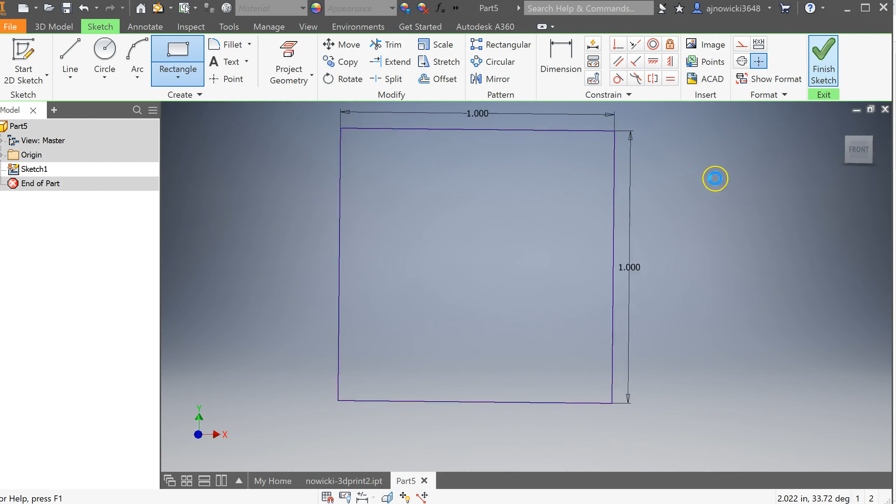So let's go to Inventor, and I'm going to make a decision die. I'll have you roll it, and two sides will have Y's on them, two sides will have an N for yes and no, and the third one will have an R for roll again. I just thought it'd be a fun little thing to make. And there we go, so there's my cube.

I want to actually fillet all the edges and stuff because I want it to roll a little nicer. And I can even set this so it's less of a fillet. Let me just flip that around. And it looks like I got all of them. Yep, okay.

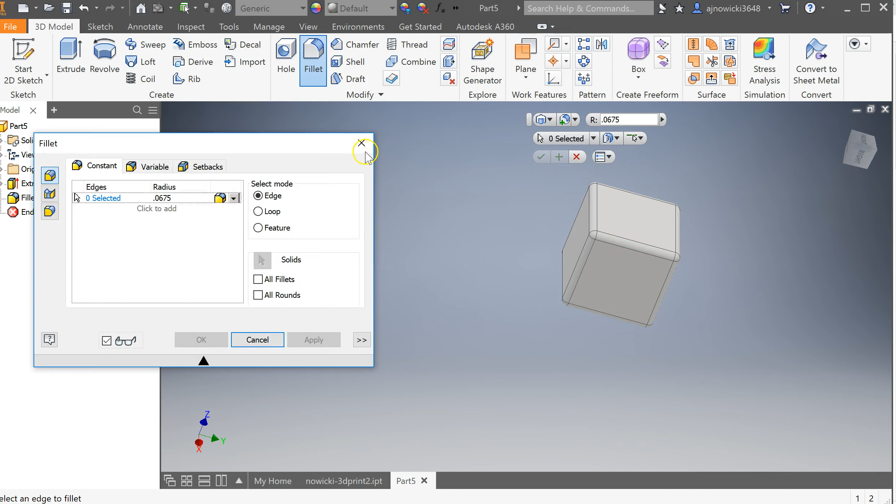Alright, so that's my die. And then I'm going to go ahead and start a new sketch, and I'm going to add my letters. So I click on text, and I'm going to click where I want it.

And then I'm going to do my Y. Now it's really weird here, I could change all these settings, but unless I have this text highlighted like this, it won't take the change. So there, I'm going to bold it, and I like the Courier New font. And then for my size, I'm going to set it to 0.5. And then I can hit OK.

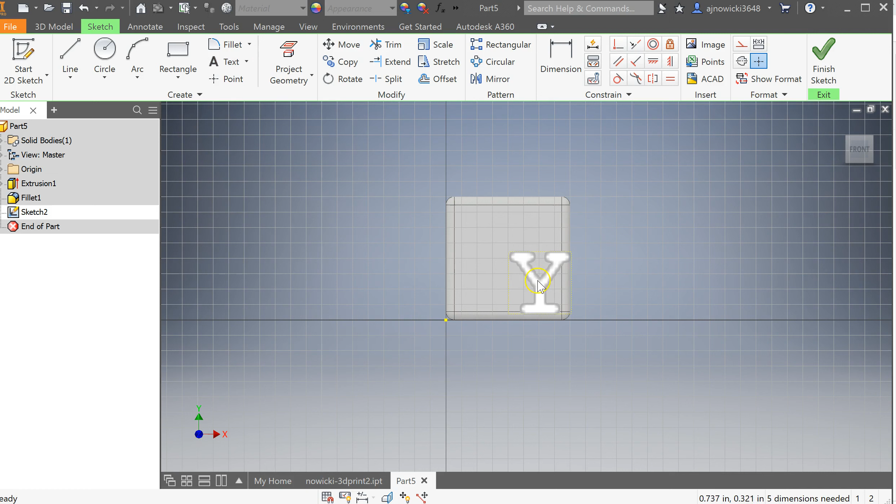I hit Escape, and now I can move this to where I want. This is where having the grid is pretty handy, so I can kind of eyeball it and space it out and center it. And then when I'm done with the sketch, I right-click Finish Sketch.

Now I have to do, you're not going to do an extrude, you're going to do what's called an emboss. So we're going to click on this, here and here, and then we're going to set our depth. And that's going to be fine. I think I had to select it first. Yep, select it, emboss.

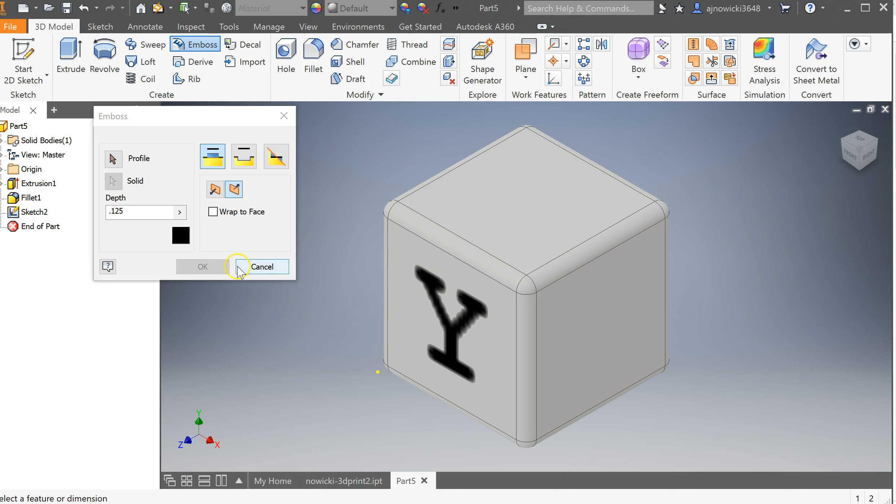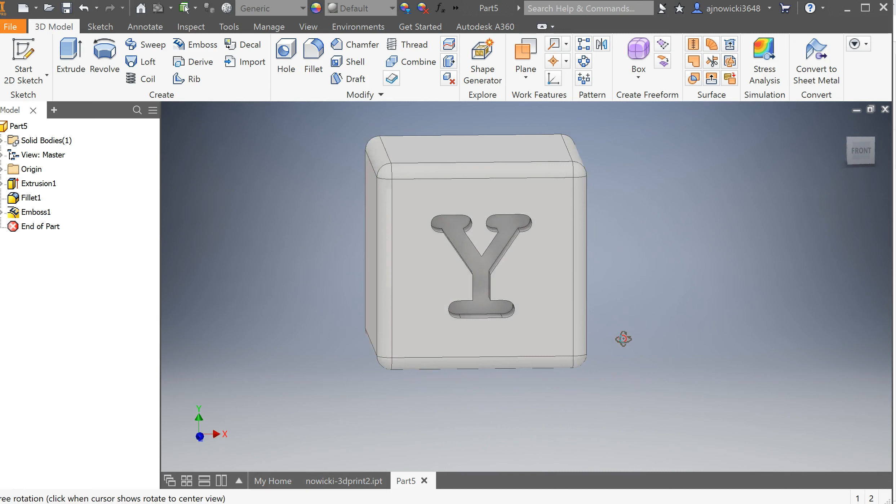Okay, so that was really weird. I had to close out of the emboss tool, and then once I click it, I click here, and then I make my changes and click OK. And now you can see it's kind of extruded into that, or cut into that.

And then I would just keep doing the same thing. Start sketch, click on the face, click my text, and here I'm going to put one of the N's. Forgot to bold that, there we go.

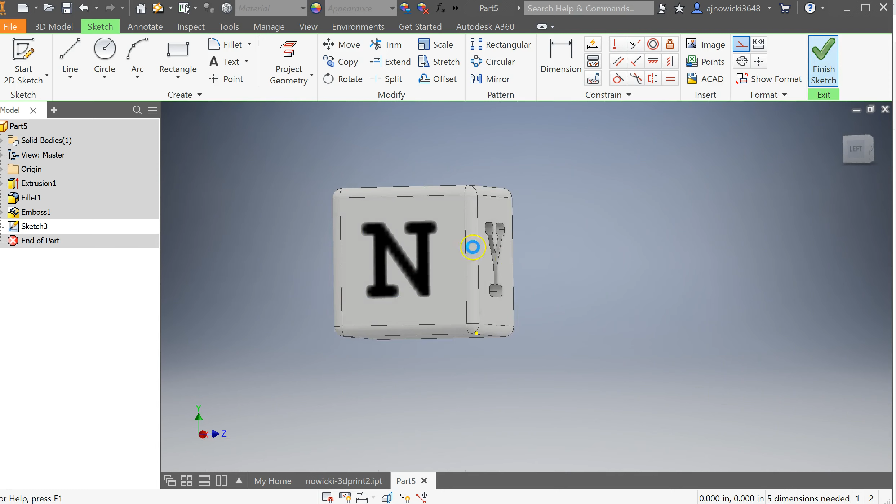Hit Escape, and now I can move this around and center that. I click Finish, then I click Emboss, click that one there, and then I say OK. And now it's set, and that's it. Keep doing that until all the sides of the die are done, or whatever you're making.

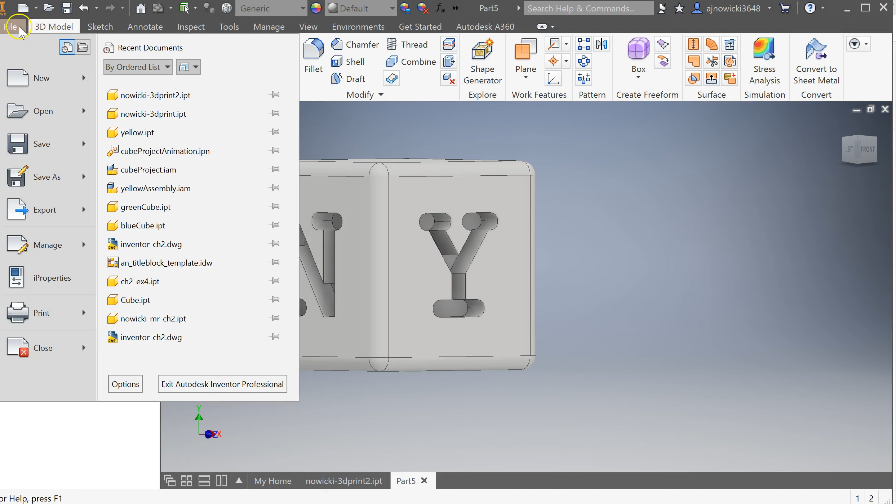And then when you're done, you're going to save it. Then when you're done saving it the first time, you have to export it so that I can 3D print it. You do that by going to File, Export, CAD Format. Here's where you hit Save as Type, make sure it's STL file, Options, and make sure the binary units is inches, and click OK. And then save. And then you're all set. Send that to me.